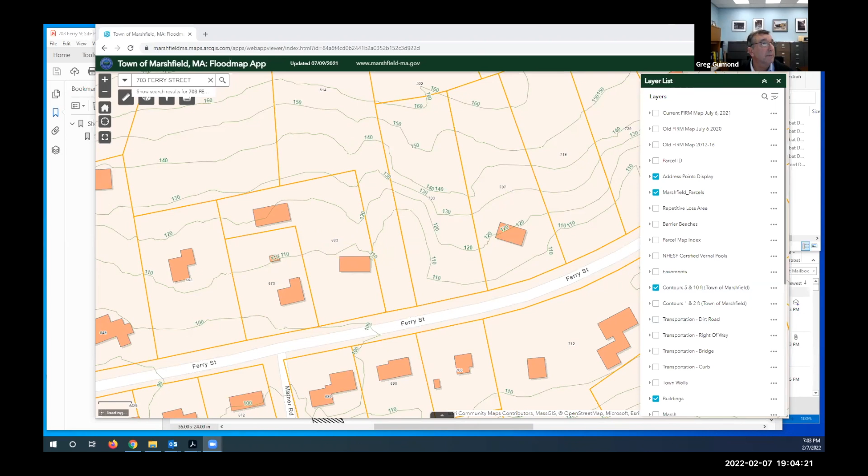So 703, is this, see the arrow, can people see the screen? Mike, can you see the screen? We can, yes. Ferry Street's down here. The property is this lot right here, 703. 707 is to the right. 683 is to the left. And the site plan, hold on one second. Can you see the site plan, Mike? Yes, just came up. All right.

So Ferry Street's at the bottom of the screen. You have the property line. There's an existing stone wall running across the property line. The plan is to take those stones and turn them into the driveway opening, and use any excess stones to repair the stone wall along the right-of-way to Ferry Street. There are no trees proposed to be removed within the right-of-way section of Ferry Street for this property. That is the plan, yes.

All right, sounds good. Any questions from the members of the board? Seeing none, is there? Sorry, I was just unmuting real quick. So if this is a scenic road, are we going to clarify just the way the plan looks? I know that we've had this before, that it has to be restored kind of to its current state, right? Will this entry kind of match existing stone walls in the area? It looks like it extends out significantly beyond.

Katie, it should match the stone wall in front of the house versus—I think what Katie's bringing up is we had someone recently put concrete instead of just the dry stone, right, Katie? Yeah, instead of the dry stack, yeah. Yes, our plan would just be to use existing stones and others to create an entryway. I think Katie is trying to make sure that it's not going to be a concrete bound wall and it's going to be a loose stack wall. That's correct. Okay, that's a good point, Katie. I think we have to remember that on future ones as well.

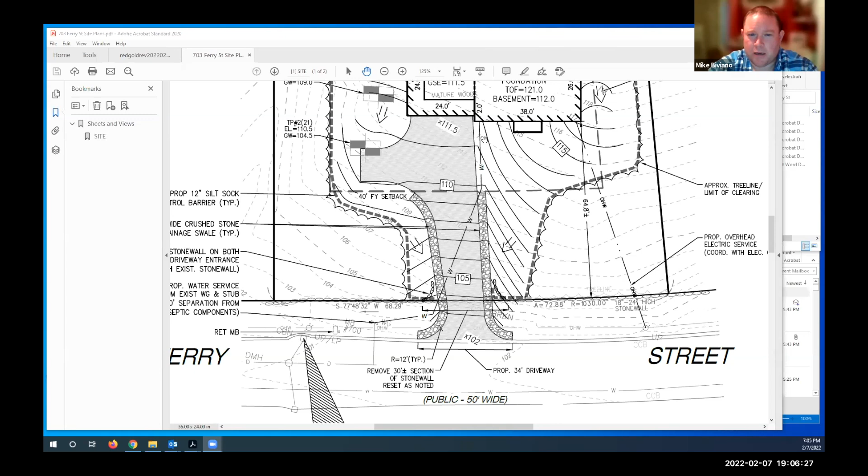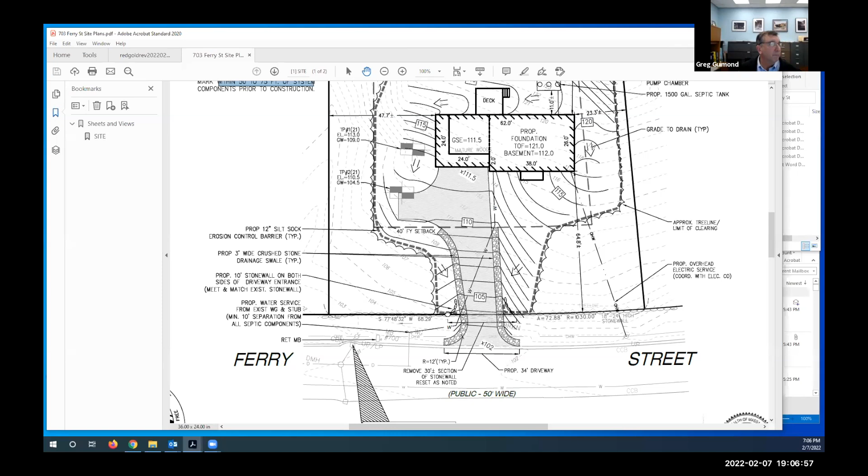Yeah, Greg, can you zoom out for a minute? I just want to read the note here. At first glance I thought what is actually proposed as crushed stone was an extension of the existing wall, but okay, right, it's a 3 foot wide crushed stone drainage swale on either side of the driveway. Okay, so the existing wall just extends in. Okay, 10 feet. Yep, got it. Okay.

All right, any other questions from board members at all? Is there anyone else here from the town? Did I see Barry here for a reason? For this? No? Okay, great.

So the second and third floor are the 4 smaller units, and then there is a 5th larger unit on the top floor. So you can see that top floor runs - actually, sorry, second floor is 4 units, and then the third floor is all one big unit.

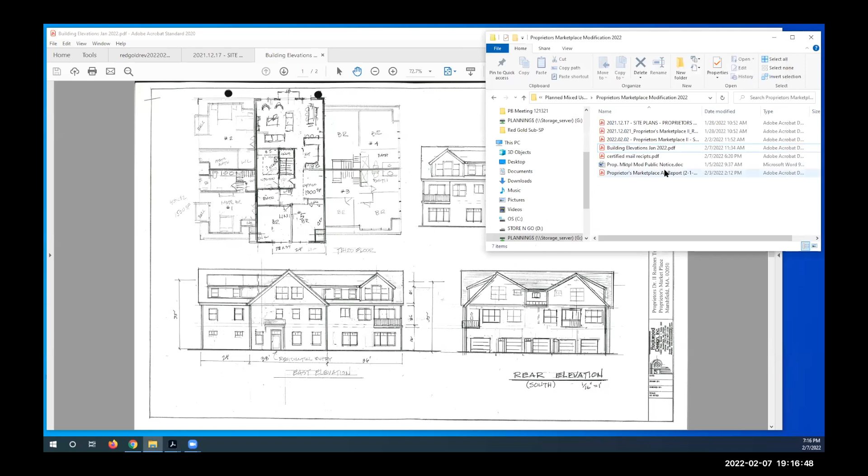Chris, is there anything you want to add on your proposal? No, other than we do have 5 parking spaces underneath the building as well. So instead of 21, there's 26 new parking spaces. Yeah, those would be garage spaces. Yep, correct.

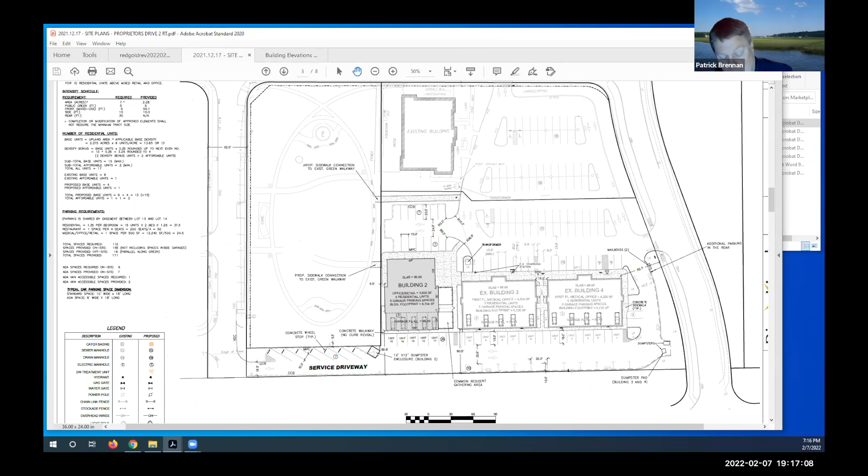Pat, is there anything you want to add? Pat Brennan with Amory Engineers. I did submit a letter to the board last week - 6 quick comments, I'll just run through them fairly quickly.

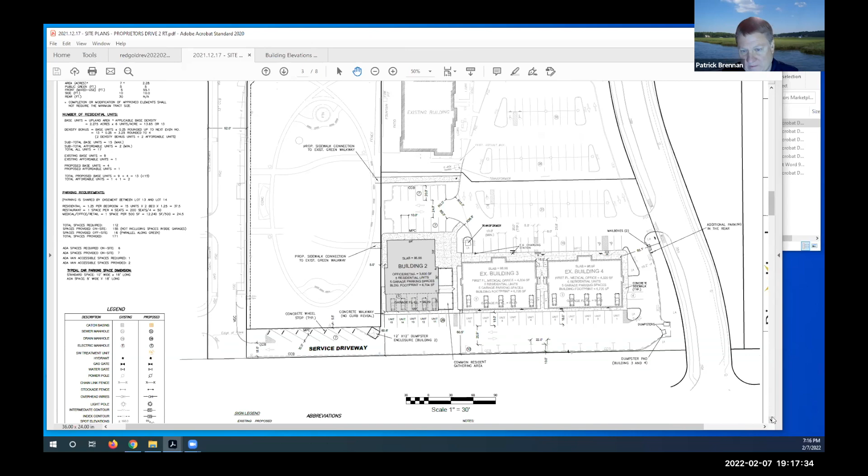They are proposing a catch basin in that 14 space parking lot between the proposed building 2 and the existing restaurant, and they show that tying into the existing drainage system. The existing drainage system has the capacity - it's just where they're tying it in. I'm not sure if there's going to be enough room in that manhole to tie it in at the elevation they're looking to tie it in for, because there's two other pipes coming in at that same elevation. So they just have to look at that a little bit closer, but it's something that they can work out, I'm sure.

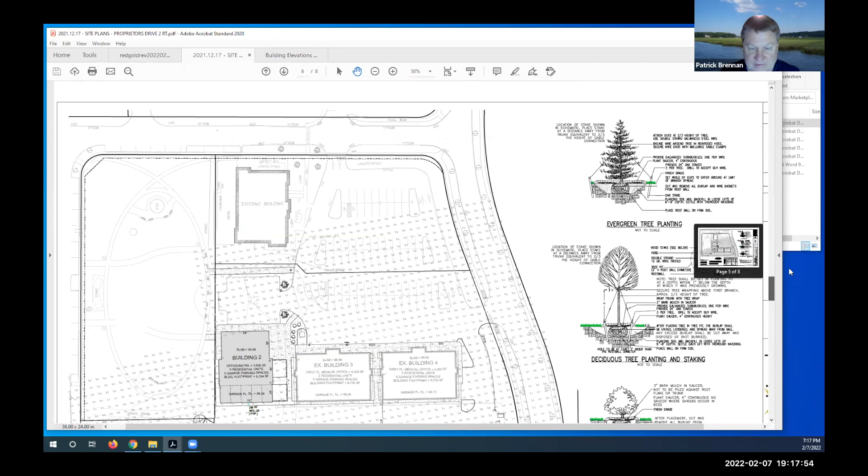I just said that a guardrail should be considered along the southerly property line. You see where down the bottom of the plan there, along there's 10 parallel parking spaces, and there's a drainage basin on the adjacent lot to the south. So I'm just saying a guardrail should be considered there, just so the cars don't go into that drainage basin.

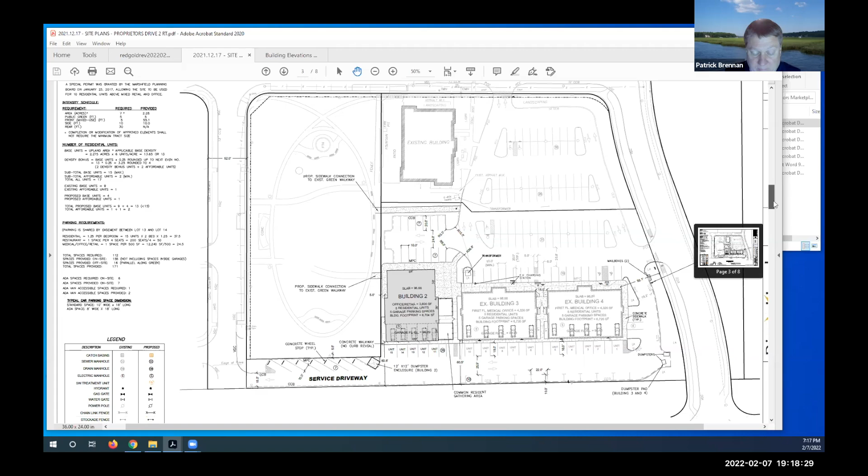They show 2 septic leaching systems. One is existing, serving buildings 3 and 4. The other one appears to be proposed for building number 2. They just don't show any tanks or anything for that one yet, so we're just asking for them to look at that.

In the 2017 plans, they had some plantings proposed in the islands off the east side of building number 4, which is the right side of that plan that you're looking at there. They're just not shown in this set of plans, and I noted that they haven't physically been placed there. So I think there's some additional landscaping that needs to be done there.

There's existing dumpsters out there for buildings 3 and 4, right where Greg's cursor is. In the 2017 plans, those were shown to be on concrete pads in an enclosure, but they're not. They're just on asphalt with no enclosure.

It's really not their issue, but it's not clear where the dumpster for the existing restaurant building is going. Currently they have 2 or 3 dumpsters sitting in that gravel parking area where this proposed building is going to go, or the parking for it will go. I believe this was an issue in 2018 when they came in to revise, and I believe it's supposed to be moved to the north side of the restaurant building. But I just wanted to identify that as well.

Those were really the only comments. I think they can all be worked out pretty easily, but I'd be happy to answer any questions.

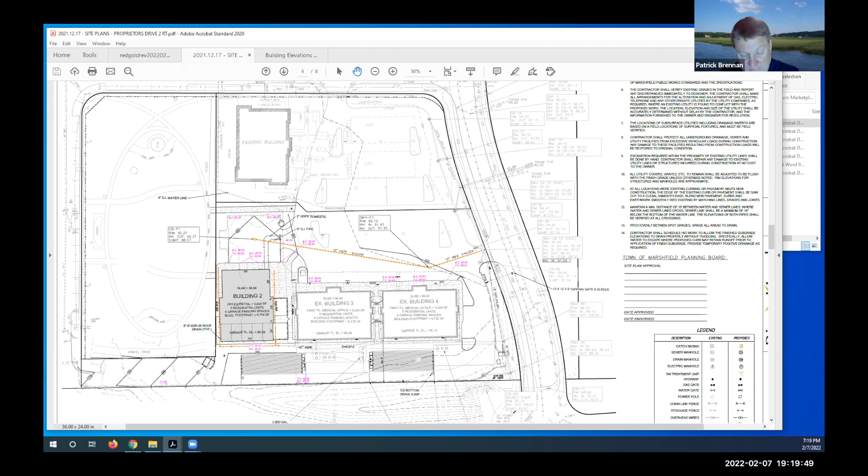A letter had gone to the property owners about the enclosed dumpsters and stuff. It had been noted in the building department, and the DPW had been working on that. They'll need an enclosed dumpster over to the left where the cursor is now, that would need to be enclosed with a concrete pad as well. It was also my understanding that the restaurant dumpsters were all moving to the Roche Brothers side of the building, or the north side of the building.

So it looks like we need the updated plan that we can't get tonight, so we'll get that at the next meeting. We can add that guardrail in. That's a good note from Pat. It should show those plantings that Pat noted are missing on the plan. And then Greg already spoke about the pads and the enclosure.

Anything else from any of the board members? At this time, okay. Anyone here from the public for this at all?

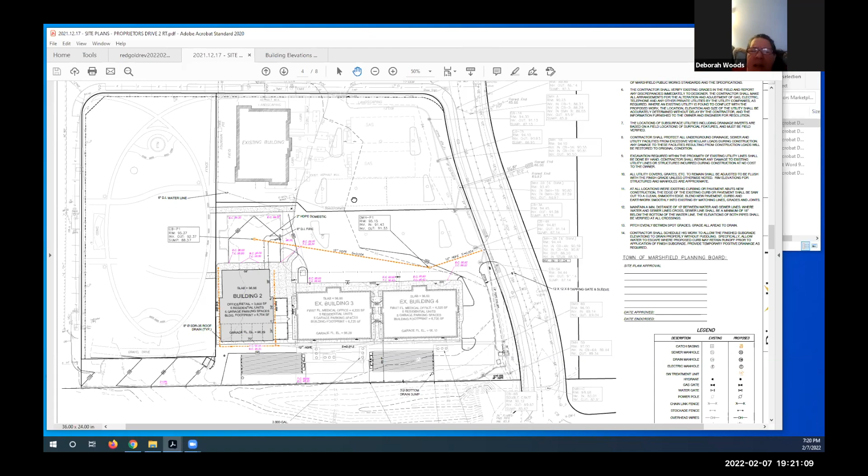Hi, my name is Deborah Woods, and I live at the Highland Green Condominium Association. And I'm not really clear why I got a letter from a lawyer to listen to this Zoom meeting.

So you are considered one of the abutters to the project, being a resident there in a certain zone, so owning property you have to be notified within so many feet, or 300 feet. Yep, 300 feet of abutters are notified.

I'm unclear because I'm not really familiar with the project, and it kind of doesn't make sense to me, because if there's still the same amount of tenants as in the other buildings. They didn't have tenants proposed before. Now they do have tenants proposed, and it's basically going to be just like those other two buildings that are there now.

Well, I guess that's it for me. Thank you. Thanks for stopping by. All right, bye. Anyone else from the public? I know there's a lot of neighbors over there. I see a hand up for Walter.

Yeah, hey guys, how are you doing? So I'm actually the immediate abutter of Unit 20 in building 3. Walter Graney, 3 Proprietors Drive, Unit 20.

Thank you. How y'all doing? So the immediate concerns that we have are a few of the residents here have purchased units under the assumption of the original plan, and especially being the end unit here, there's a potential adverse effect of loss of value of no longer being an end unit at the time of resale. That's MLS data, you can look that up left, right, and center.

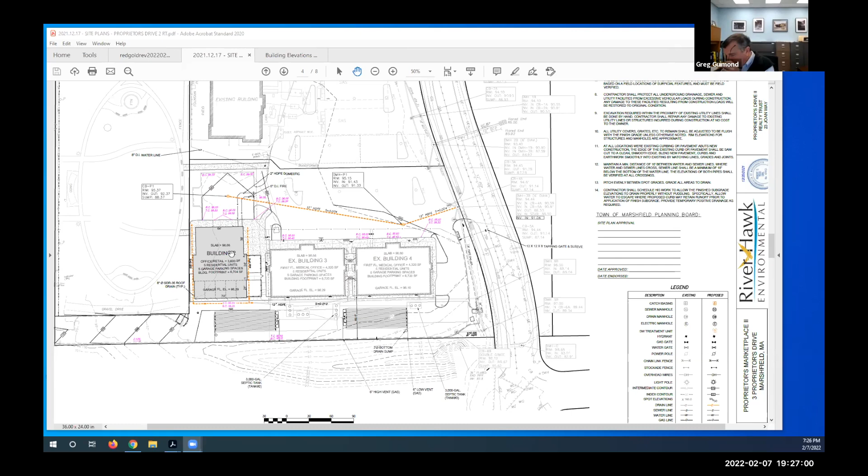Did you have anything else to add, Walter? No, this has been awesome. Thank you, guys. Okay, thank you. Anyone else here from the public?

Don't see any other hands, Mike. I do have 4 letters that were dropped off by Chris McKenna today from the 2 dentist offices, from Mia Regatta, and one of the residents in the buildings that all support the proposed new building. So Mia Regatta, 2 of the owners, the 2 dentist offices on the first floor of buildings 3 and 4, and one of the residents within the 3 and 4 units.

Okay, that's fine. Any board members need any questions or have to add anything else at this time? No, I think it would be great if the applicant could work with the abutters and see if there's any way to minimize the effects here. I think your questions were good - try to be creative.

Yeah, Bob, I think my biggest holdup right now is not adversely affecting what Walter brought up. That's pretty big - blocking his view, that's not what he bought into, what was proposed. And also having a proposed fire pit hangout area right below his windows. That seems pretty different than what was supposed to be there.

Sorry, I should also just clarify, I second everything, but it makes it so much easier for whoever is taking minutes. It's not only that, but on Zoom it makes it so much easier to get through it. So you don't have to second anything you don't want to. Oh, I know, don't worry. Yeah, I make motions for things I vote against, so it's fine. It's just the way business is done.

Okay, I forget who was presenting. Rich Grady. Okay, hey, go ahead, Rich. I feel like I'm at home now. They usually forget me at home. Yeah, I can't see you, I can only see 3 people at a time.

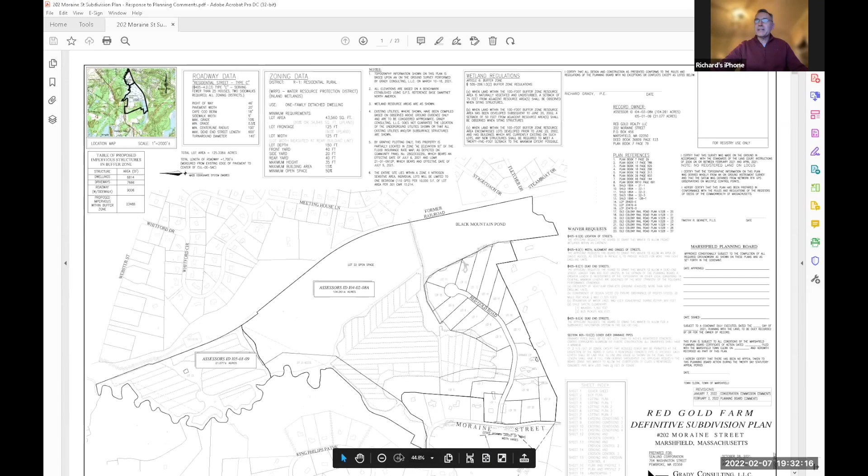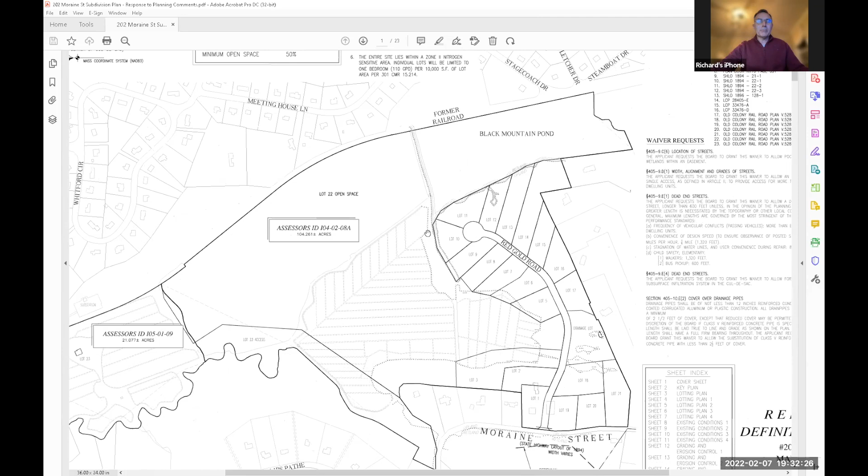So this is a continued hearing for the Red Gold Farm definitive subdivision. I'm sharing sheet 1 of my screen right here, and I don't want to run through every comment, but I'll run through the big picture items. We've been working closely with Greg, with Pat Brennan to address his comments, with Conservation Commission, Bill Grafton, and also Ed Eichner on the nitrogen loading analysis for the project.

Some of the big picture items: there was an additional lot on the initial submittal that we've eliminated. That brought into question whether or not we could access over another lot. That has been eliminated with this new configuration. So we have these 3 lots here prior to the 66.9 acres of open space lot that's proposed, and we've eliminated one that previously had frontage through the drainage basin.

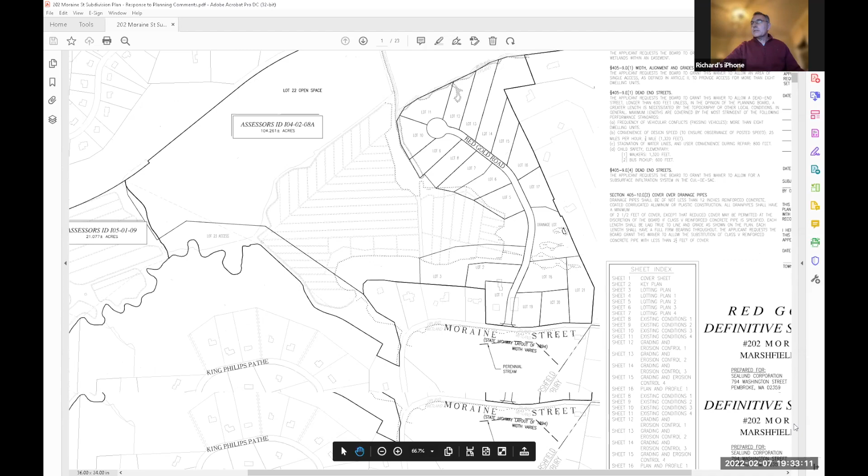I'd like to switch to sheet 13 here now. It'll just take me a moment to get there.

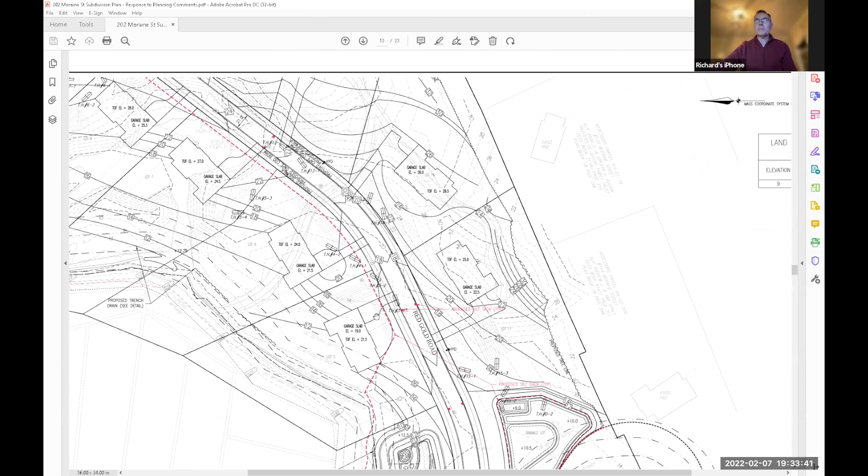Did lot 25 go away as well, Rick? No, okay, I just didn't see it on that plan. I'll let you keep going. Okay, it is still there. That would be the existing house out in the middle of the cranberry bogs that has access off of Webster Street. We do propose to retain that house lot there as well. Although we are providing frontage for it on Moraine Street, we're not proposing to change their access, which currently exists off of an easement through Webster Street.

So some of the big picture items we had going on here: Conservation Commission identified an area which they considered to be a potential vernal pool within the wetland regulations for the town of Marshfield. They have a 100-foot no-touch area for a vernal pool. So we are not going to contest that potential vernal pool, we're going to assume that it is one. We revised the constructed stormwater wetland to provide the 100-foot no-touch area around that vernal pool area, resulting in a slight reconfiguration. We're also able to shrink up the stormwater wetland a little bit on this side of the street here.

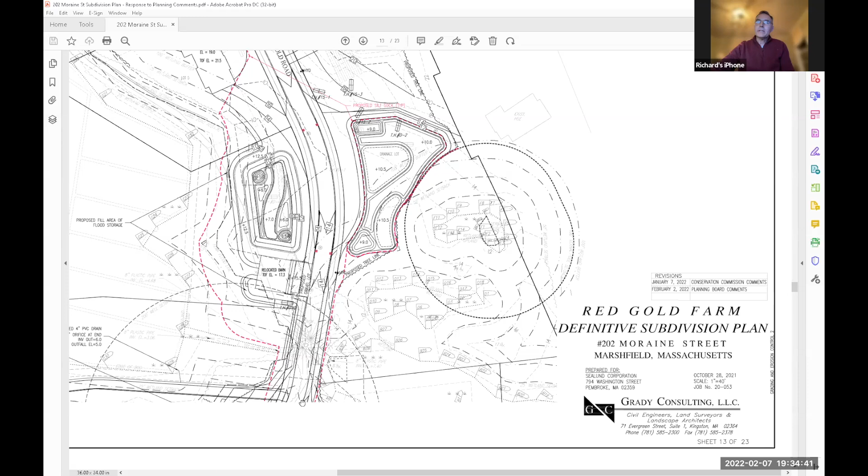And what we would like to do is relocate the cranberry sorting machine historic barn. Kevin's been working with the Historic Commission on that, and it seems like something that is desirable to the Historic Commission.

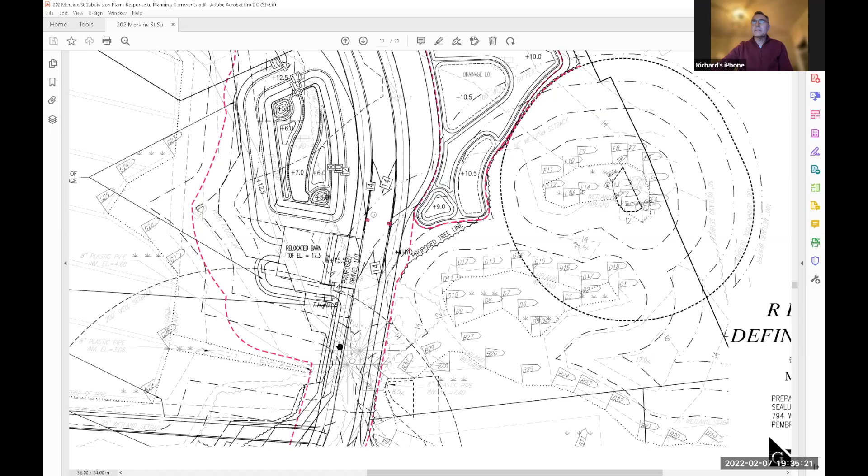So we've laid that out in a manner that we can do a little bit of gravel parking off the subdivision roadway. We can maintain a walkout basement, which is how this is currently configured. The current walkout actually faces Moraine Street, but the grading itself is set up to mimic what's going on with the existing location there, on the open space lot here with a little bit of gravel parking out in front. The grading actually works out really well. We think it's a good placement to be over there on the open space.

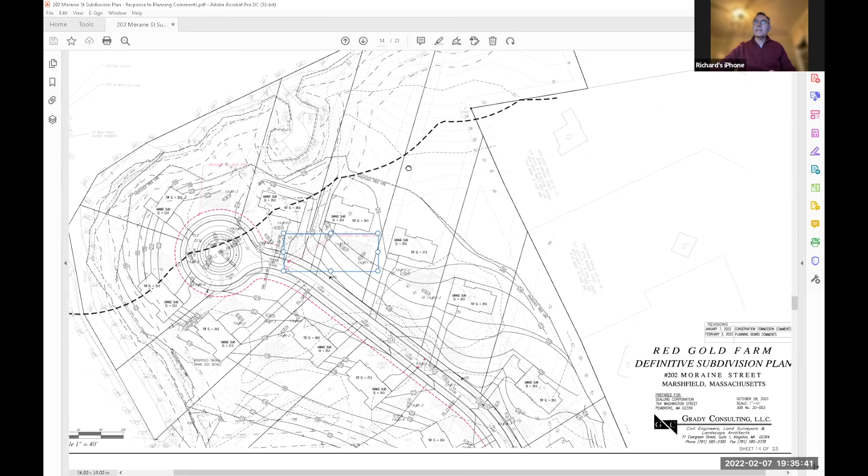We had proposed subsurface infiltration with a galley system in the cul-de-sac. We understand that would have required a waiver from the planning board regulations. We've been working with Pat. One interesting caveat with the constructed stormwater wetlands is that it doesn't provide for recharge. So it's a great system for the drainage here, but we needed to find a way to get some recharge on site through the stormwater system.

We were working with Pat Brennan on this, and we decided that the best approach would be to eliminate the galley system below the cul-de-sac that was previously proposed and construct a rain garden in the center of the cul-de-sac. So the pavement for that cul-de-sac is now super elevated, so it all slopes back towards the center. With that, the rain garden provides the required recharge volume that the stormwater manual dictates for us. So we saw that as kind of a big change here as well.

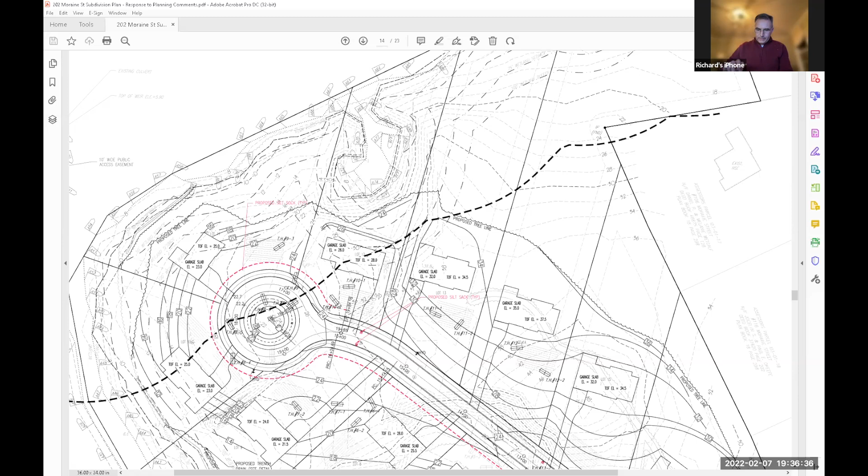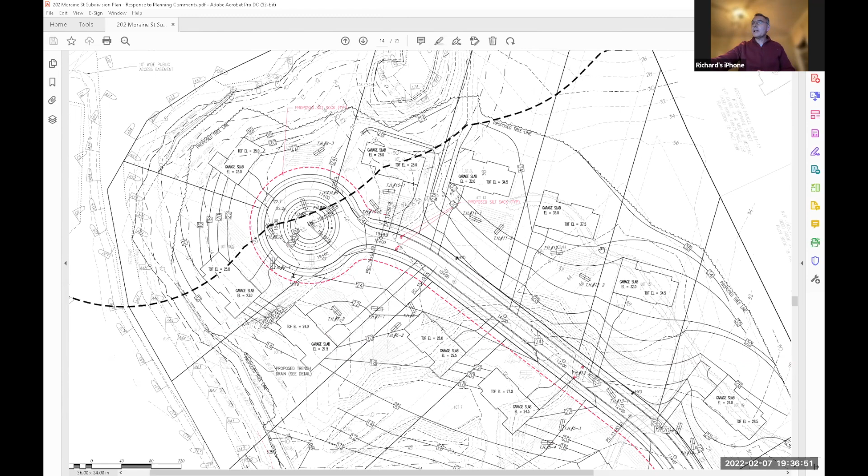We would also like to relocate the existing metal building that's at the approach off of Moraine Street to be utilized for the cranberry operations. We identified a spot on the plan here - there is an area adjacent to the bogs to the rear of lot 3 on the open space where that could still be utilized for the cranberry bog operations. It'd be outside of the Conservation Commission's 75-foot structure setback, so this actually works out as an okay location for us back in this area.

We were working on nitrogen loading calculations up until this afternoon with Ed Eichner. I believe we're in a place where Ed is satisfied that we are able to meet the 5 parts per million on the calculations, but I won't speak for him. We'll give him a chance to comment back to the board.

This has been an interesting project as far as all the discussion with the open space and walking trails. I believe Kevin Sealund has been speaking with Greg quite a bit. I believe there's at least some preliminary commitments to construct the boardwalk on the existing railroad bed and to construct a section of walkway to Parsonage Street over a combination of existing railroad bed and maybe a little bit on Webster Street. We don't have anything firm to share with the board on that tonight - those are both kind of preliminary items.

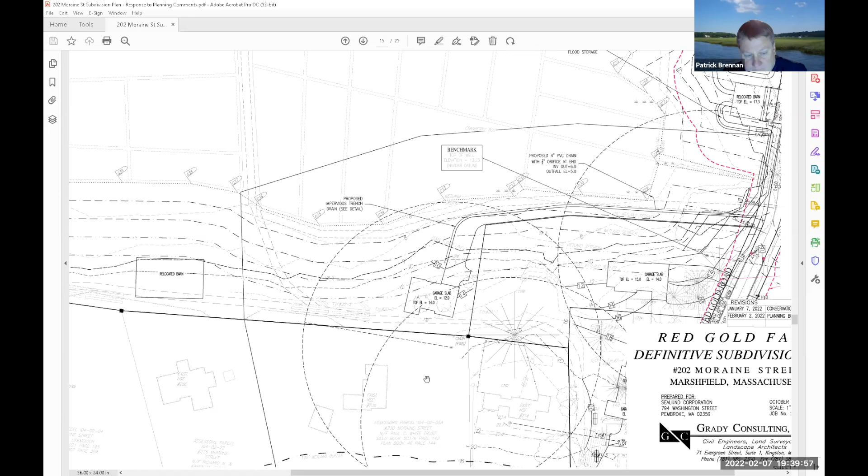Greg, you want to go to Pat? Yes, please. Okay, Pat, want to go over your comments? Rick, yeah, thanks - stop sharing the screen, Mike? Yes, I will do that right now.

I had briefly gone over some of my comments at the last public hearing. I've gone through the revised plans that Rick has sent over, and they've addressed a good number of my original comments. The only thing we haven't received yet is a revised stormwater report, so I'm waiting on that before putting anything in writing back to the board. At this point, I'll hold off on additional comments until I get that report.

Quick question, what's the result of them not putting concrete at the street there? I know they don't need it all the way down the street, but just at the basins.

The granite curb openings for the catch basins provide additional capacity for the catch basins to pass water. When we get the revised stormwater report, I will check those grate capacities. I did talk with Kevin Sealund about that today. I don't think the flow to the catch basins on the site requires a curb throat stone, and Kevin suggested that in some of the sag areas, if there's a concern, they can put double catch basin grates in there instead of the granite throat stones.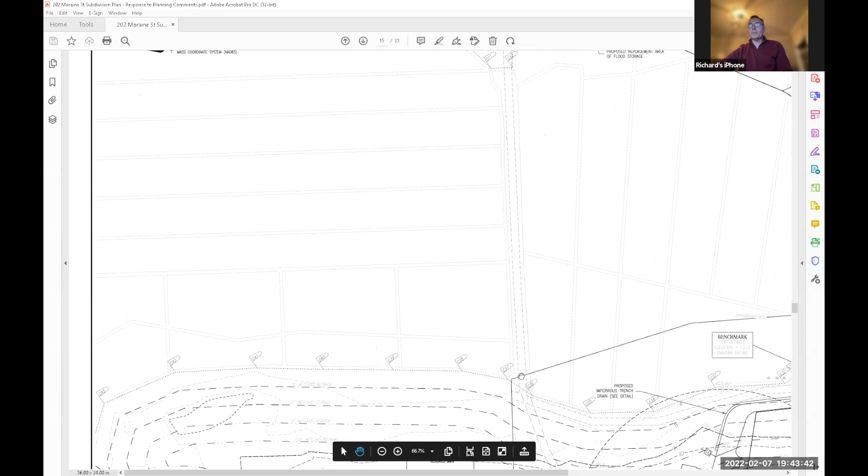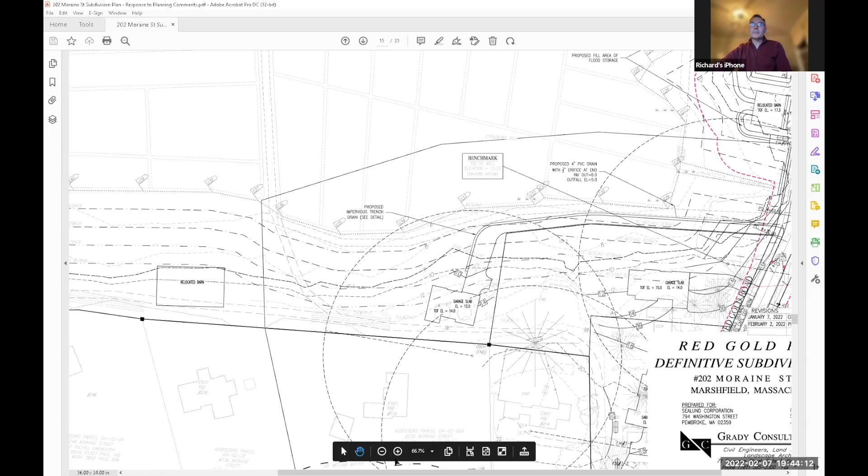Part of both access and open space here is that the cranberry bogs are surrounded by sand or dirt paths around all of the bogs. There is an existing bog road right along the edge here, so they would continue to use that bog road to access the area where that barn would be proposed. We're also proposing an easement over that same bog road for access to the open space, as we're considering all of this 66.9 acres of open space lot to be connected to the open space rail trails. So as we zoom out a little, really all of the roads around the bogs would be part of that network.

Okay, so the access would be... let me see if I can pull up a line. I guess I was wondering, does it have its own frontage, or is it accessing across another lot, like access over lot 3? Rick, I think that's what you're using, that driveway, right? So right now, what'll happen is, yes, there would be an easement over lot 3, and basically that existing bog road is right along here.

And it would access something along these lines where that magenta line is located.

I do appreciate this, because that was one of my concerns at our last meeting—I wanted to see the access over each lot's frontage. So I appreciate that change.

I'll just have to think about that one, because I don't want to hear from owners in the future saying they don't want trucks accessing over their property. I'd want to know a little more about how that worked.

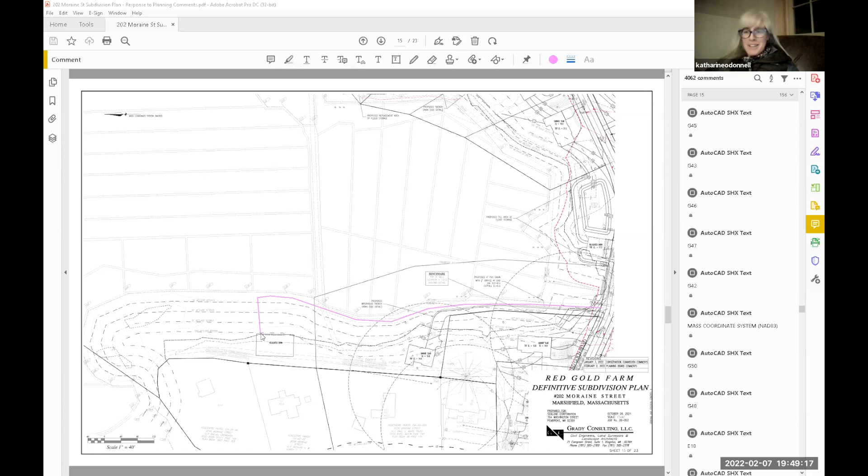Yes, and my personal experience—I would just say I think it's very hard to farm by committee, has been my observation, but I'll just throw it out there.

So all the roads around are part of open space, but the bogs themselves—are you going to try to convey those back to the town as open space? I was just throwing out the possibilities there. I don't know—Kevin and I will have to see if we can figure out a solid answer, because we've gone around on it but haven't come up with a solid proposal yet. So are all the bogs themselves one completely separate lot, lot 26, call it?

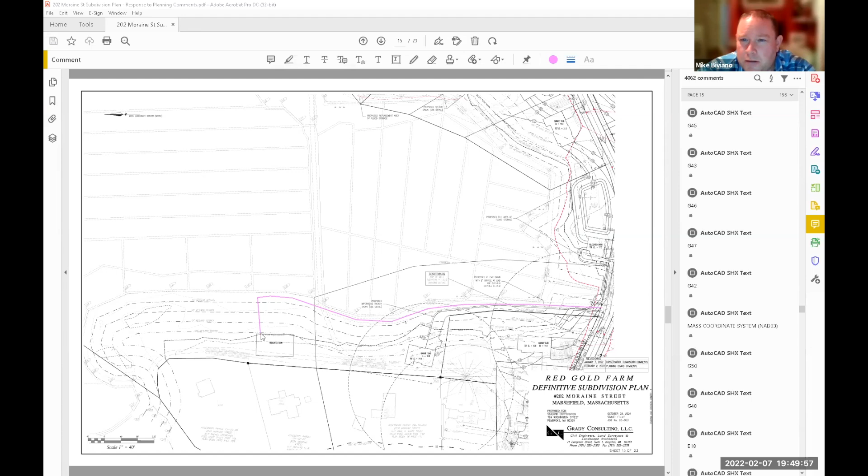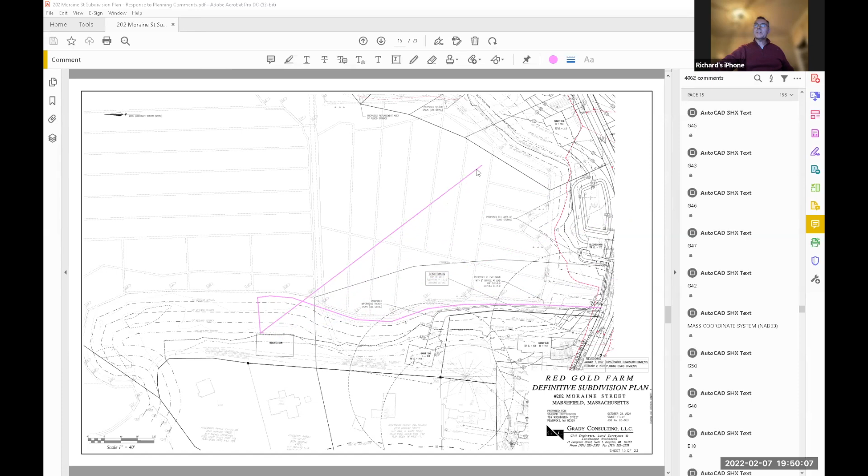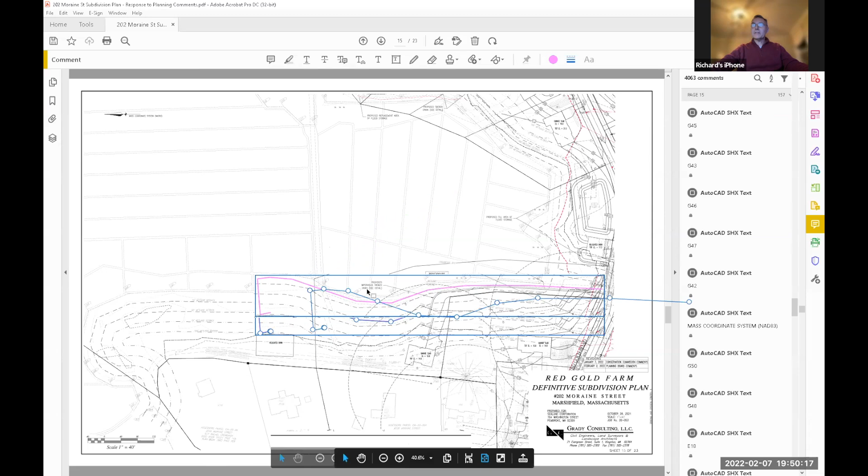There are some portions of the bogs that do extend slightly onto some of the lots, so there are easements proposed. Let me see if I can stop drawing this line—the PDF is very slow at the moment. There we go. So on the back sections of some of these lots, there are stretches of about 20 feet that would need easements on the back of the lots.

Because they go into the bogs? Correct. Zoning requires that 80% of the required area be uplands, which allows for up to 20% of the lot area to be wetland—in this case, the cranberry bogs. So there would be easements along the backs of those lots onto the cranberry bogs. That's not going to be confusing at all.

As somebody who skates on the bogs in the wintertime, I would really like it, but I realize it's not for everybody either.

Okay, well, plenty of things to work through there. Mike? Greg, go ahead.

One of the things Kevin and I have been talking about, Kevin was hoping to get a sense tonight, not a vote, but a sense, was whether the board members are okay with the right-of-way reduction from 50 feet to 40 and waiving both sidewalks based on public benefits.

The public benefits we've talked about so far are relocation and saving of the wooden barn and the cranberry sorter, and elevated walkways on the south side along the Eversource former railroad right-of-way, roughly 360 to 400 feet.

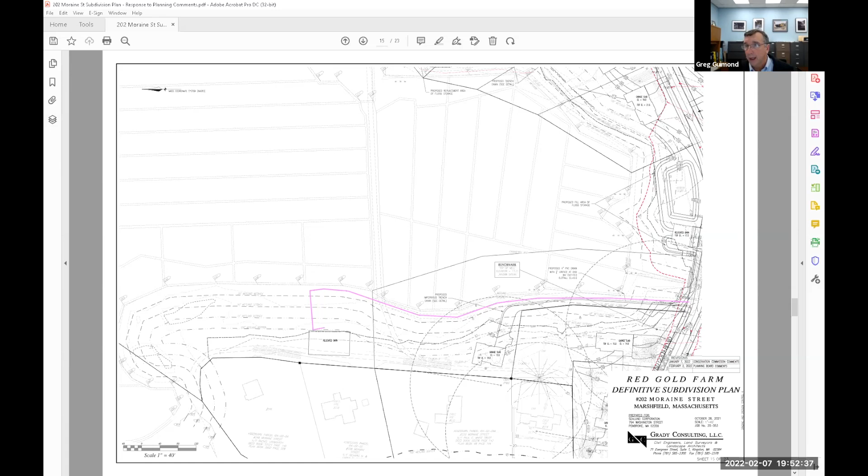One thing Kevin and I have talked about but hadn't thoroughly discussed was the possibility of a conservation restriction on the cranberry bogs, the pond, and the large wetland area, in order to get flood insurance credits, since that section of land is in the floodplain.

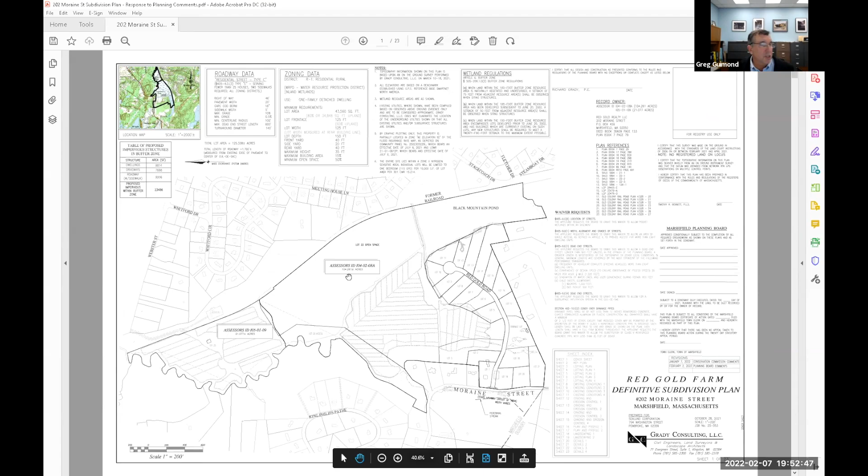Rick, can you end that? I'm going to share a color screen version so I can quickly run over things. Greg, should be all set. While you're doing that, I can think about it.

Is the road short enough and windy enough to not need a sidewalk, so cars can't do 50 miles an hour down it? It is a longer road, but it is not a straight road. And it's proposed at 20 feet wide, so it's not a very wide road, not like a 36-foot or even a 24 or 26-foot wide road.

I'm putting it out there because I see the benefit, on the public side, of having a connection to the downtown for both this subdivision, potentially King Philip's Path, and potentially the Black Mount area, as well as tying into the Old Pilgrim Trail and going all the way down to Caswell Street, Route 139, on the former railroad right-of-way. So it really brings the whole southern part of the town into the downtown and then onto the bridle path that takes you up north to all the conservation lands up there.

Here's Steamboat Drive up here, and that's the section right here where they'd have to put the elevated walkway. Then you come over their causeway, and that's where the trail splits.

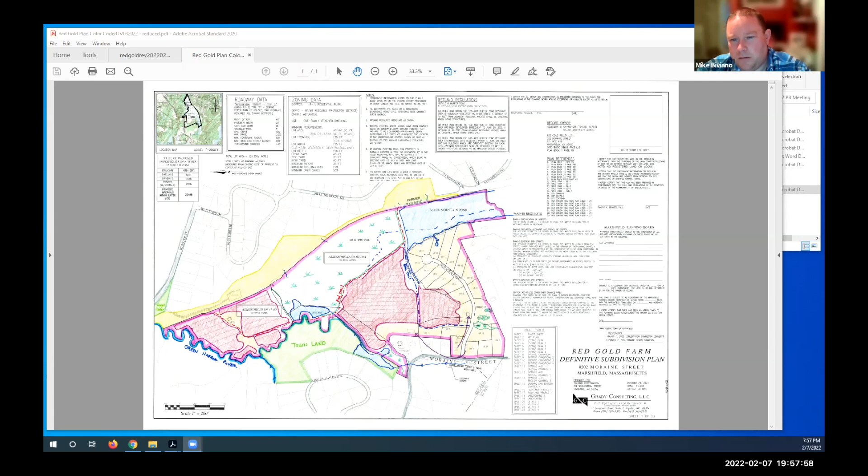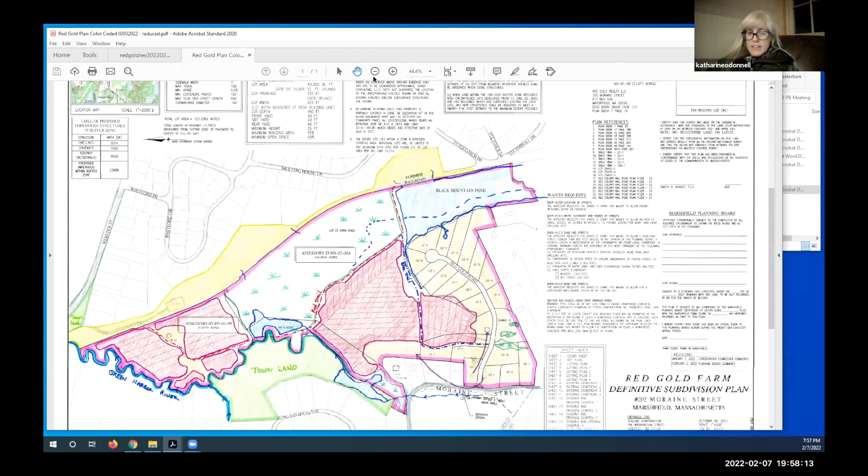I don't have any strong opposition to those roadway and sidewalk proposals. And I think for me, it's more just firming up what the public benefits are. I feel like a lot of different options are being discussed right now, and so I just need to see them enumerated - what is being proposed and how well that balances with the additional lots being granted through these waivers.

I don't think it's necessarily granting additional lots as it is they're wondering about just getting rid of the sidewalks at this point. No, and that's why I'm saying I don't mind the roadway, but normally on a cul-de-sac we would only permit 8 lots, correct? Without the waiver - so that's what I'm thinking of, all of the other additional waivers as well. But those two, the roadway and the sidewalks, I don't have a strong opposition to.

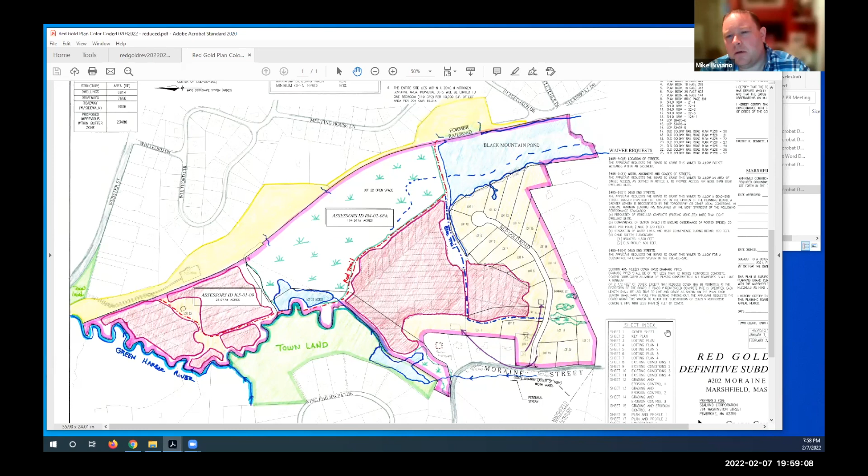Yeah, Mike, for me, obviously the proposed trail ideas, that's a significant public benefit in my opinion. But I think the sidewalk and the road is just something I need to think a little more about. Obviously I understand from the cost side, they're trying to offset costs, which I can absolutely appreciate given what's being offered - again, just need to think about it a little bit more.

And there could possibly, Greg, be a compromise if we think there needs to be a sidewalk going up, even if it's not a concrete paved sidewalk - just if we think the road is going to be a little fast, it wouldn't be nearly as expensive. But you guys could waive both, you could waive one - it's up to the board.

All right, well, I'm for what I think greatly outweighs - if we decide to get rid of the sidewalk, or let them do a paved sidewalk. If we decide on the road, it is pretty long, and I think a car could get going pretty fast because it's pretty flat. So I think what we're getting is pretty good, but safety is important on that street too, for everyone going down to the bus stop and whatnot.

Anyone else on the board? Okay, all right, nothing for anyone else, so that's fine. I hope it gives you some direction - there's 3 of us that are definitely in favor, with a little more thinking to do, but I think you can move ahead pretty safely with those plans for possibly no sidewalk there.

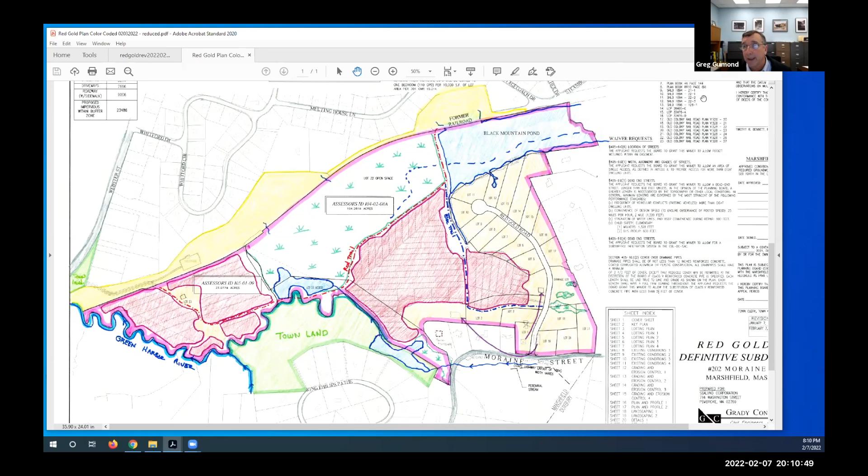So you're saying there's a maximum 4 to 6 parking spaces contemplated, or is that not firm? That's what's contemplated at the moment, but it would be up to the Trails Committee to figure that out. Thank you. Okay, thank you.

Anyone else from the public here for this? I think Ned Banks had his hand up. Okay sorry, I didn't see that. Ned, are you there? Yes. Oh, there you go, you're way up in the corner. Sorry, I didn't look up there. That's all right. Go ahead, Ned. Good, thanks. Yep, Ned Banks, Woodland Circle, Vice Chair of the Recreation Trails Committee.

We just wanted to state that the RTC supports the trails contemplated there for several reasons. As Greg mentioned, the trail would be part of a large improvement and adds to the spine of the trails from CVS to Station Street, and it would work towards our goal of having trails from the border of Scituate to the border of Duxbury for safe passage. It would open up trails to the downtown for the new subdivision as well as Black Mount, and of course walking through the bogs would be a great positive experience on trails. So we're supportive of the plans for the trails at this time at that location. Great, thank you. Could be a great project when it all goes through.